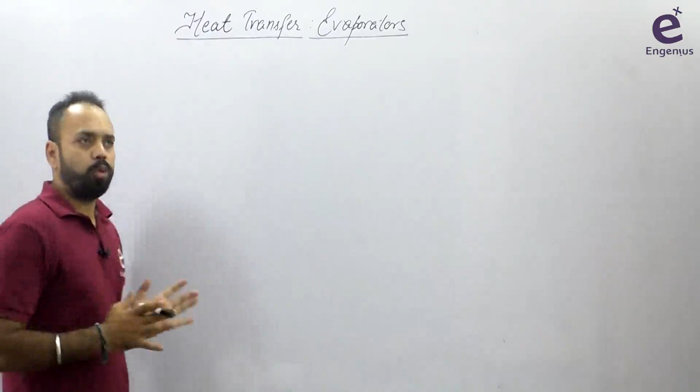What we are going to discuss here is how to calculate the area in the evaporator. This is the main point of our discussion because some numericals have come before and in upcoming exams more numericals can come for calculating the area. In 2020, there was a question based on multiple effect evaporators.

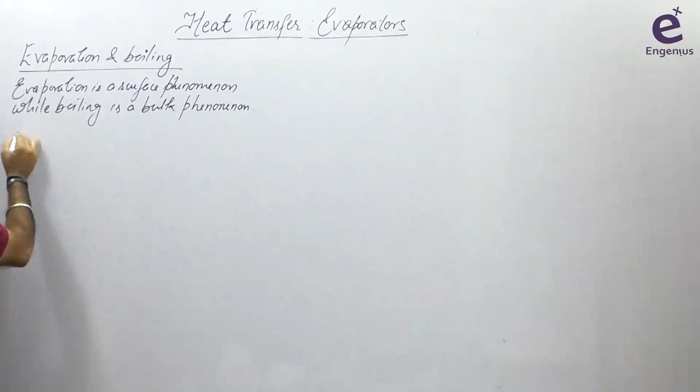Now you will ask, sir, to evaporate is it not necessary to go up to the boiling point? No, you can see the sea water - you know that sea water continuously, or water in a river, continuously evaporates. But if you put your finger inside that sea water or river water, it is not present at the boiling temperature. So the surface molecules of river water, sea water, a pond or a lake, they are having sufficient energy to go into the vapor phase.

Only the surface molecules - so evaporation can take place at any temperature. You will ask, sir, does that mean evaporation happens even at 5 degrees? Yes, some extent of evaporation is there. Some molecules always have sufficient energy which can go into the vapor phase. Evaporation can take place at any temperature, while boiling requires the entire liquid to be present at a specific temperature.

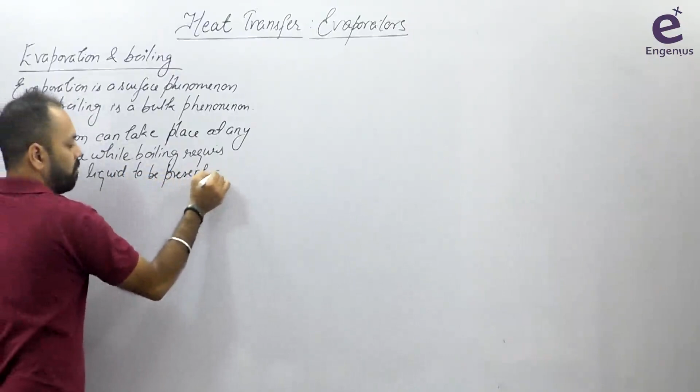These are the two main differences. Entire liquid has to be present at a specific temperature - these are the two major differences between evaporation and boiling. There can be some other minor differences as well.

Now the question arises, sir, what is the difference between evaporation and drying? Here a bit of confusion can happen because sometimes you may see that in the drying topic it is written that the moisture in the solid is evaporated. So in drying itself you are using the word evaporation. So they are actually having similar meaning - there is no phenomena difference between evaporation and drying. Evaporation and drying almost have the same meaning.

But the word drying is generally not used when you have a liquid which is vaporizing. The drying word is used when removal of moisture is taking place from a solid. But of course, for removal of moisture, the moisture is getting evaporated into air. So the word drying is with respect to solid. You wouldn't say that a liquid in a container is getting dried - you wouldn't say that, right? No. So the drying word is particularly used when moisture is getting removed from a solid by evaporation.

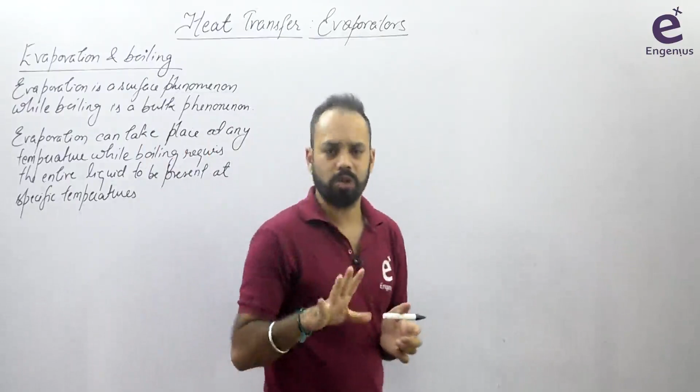So what is the difference between drying and evaporation? This is not exactly the right question to ask. But still some people who want to show you that you don't know anything, they may poke you saying you don't know anything - what is the difference between drying and evaporation? For that kind of situation, your answer should be: drying is referred to as removal of moisture from solid, while evaporation, normally when we say evaporation, we are referring to liquid.

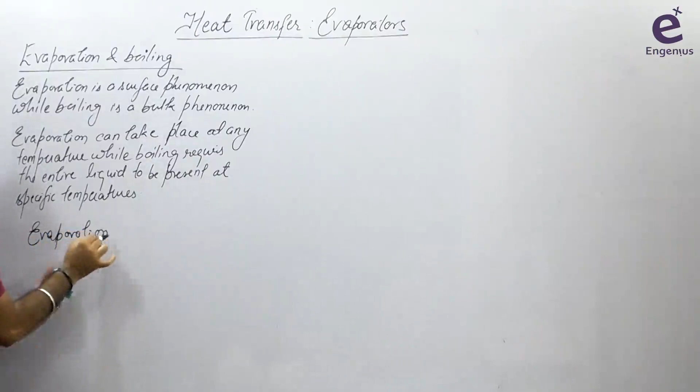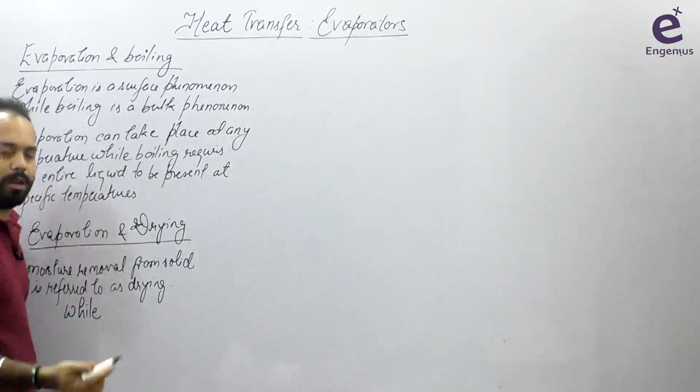So moisture removal from solid is referred to as drying. And when moisture removal from liquid happens, this kind of statement we don't usually give when evaporation is taking place, that moisture is removed from the liquid - such a statement isn't correct, right. So moisture removal from solid is referred to as drying, while the evaporation word is more common when a vapor is produced from a liquid. Evaporation word is used for vapors coming out of a liquid, for vapors coming out of water. Here's one more difference I'll tell you - when it is water, we use the word evaporation, but when it is any other liquid, we use the word vaporization. The phenomena is the same, but it's all about which particular word is suitable for what situation.

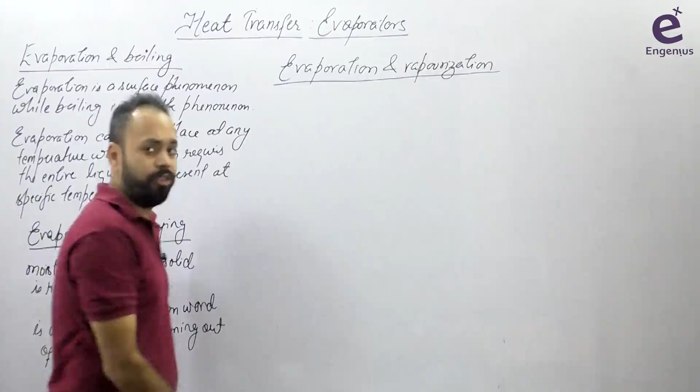So if someone asks you what is the difference between evaporation and vaporization, again it's all about in which situation we are using it. Otherwise things are same - the liquid is getting converted into vapor. So what is the difference? When it is water, we use the word evaporation. When other liquids, mostly organic liquids, we use the word vaporization. So for water turning to vapor, we use the word evaporation. For other liquids going into their respective vapor form, we use the word vaporization. So what is this? Vaporization. And what is this? Evaporation. It's all about where is the proper use.

Otherwise there is no strict rule for this. You'll find both words written in books. Many times in books you'll see drying and evaporation used simultaneously. I am telling you that evaporation of moisture from a solid leads to drying of the solid. Now you don't need to get confused there. This definition, these differences, I am just listing out for the records so that yes, I have read this too.

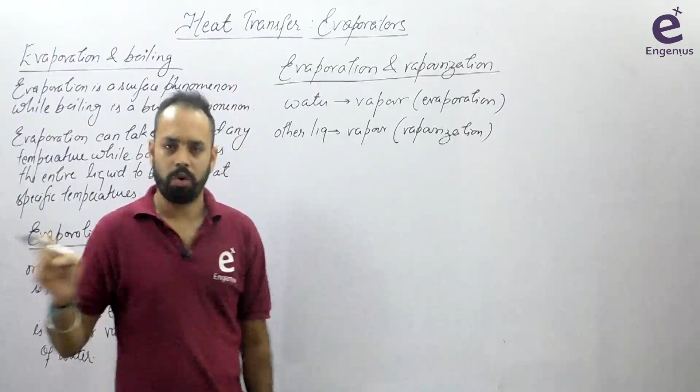Many of my friends - in fact one of them was my close friend in BTech. I think I've given his example many times. He was selected in IOCL in the passing year itself, 2013, when I did not know anything about chemical engineering. Most of the subjects I was almost zero in. If I kept comparing, then maybe I would not be here today. Then I thought, okay, he had to go, it happened, right. I took a drop. I was not preparing for GATE - actually I was teaching chemistry. But somehow in November, December, I thought okay, I should do something, let's study for GATE. I prepared for GATE, got into IIT Roorkee, and during my MTech I prepared all these subjects. Nobody was there to teach me. No teacher came and said, come, let me teach you thermodynamics. Even in IITs, nobody is going to teach you. You have to realize yourself that I have already spent 4 years in my BTech, then one more year as a drop - if I don't study now, then when will I study? When am I going to understand all these subjects? Otherwise, there's one more way - you leave all these subjects. One of my friends in final year told me, Pandey, this temperature-pressure stuff is too much, now I'm going to prepare for SBI PO. Okay, he chose his path. It's perfectly all right. I never say that going for MBA is fine or going for SBI PO is fine, going for UPSC is fine or going for GATE is fine.

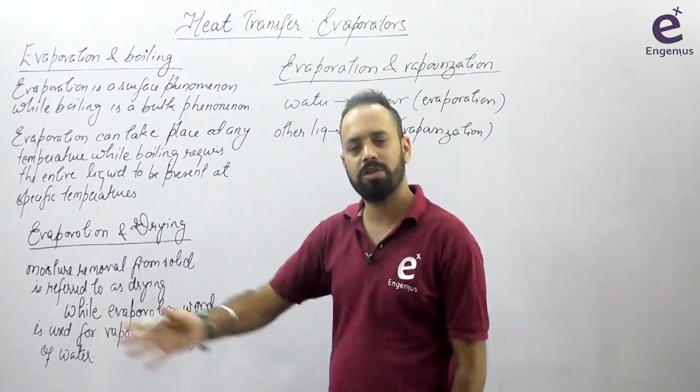But for the records we have discussed this. Okay, now let's talk about how evaporation takes place. My focus is the design of evaporators, right? So let's discuss a few things.

On the basis of number of effects. Effects means, sometimes we use multiple evaporators, sometimes we use single evaporators, right? So on the basis of number of effects, we have two types of cases. One is single effect evaporator, where only one evaporator will be used, and the other is multiple effect evaporators.

How many evaporators do you have? Suppose if you have only a single evaporator, it is called single effect. If you have multiple evaporators connected in series, I'll tell you the ways in which evaporators can be connected. I'll show you the proper diagram, right?

But if you have more than one evaporator connected in series, it is called multiple effect, as opposed to single effect. Now the question arises, because theoretical questions are made on this often: out of single effect evaporator and multiple effect evaporator, which one is more beneficial? And you also can't say one is simply more beneficial, because if in one aspect you are getting a benefit, then in another aspect you will be facing a loss.

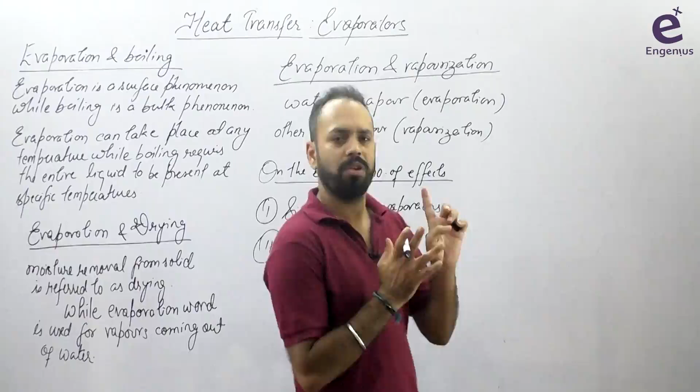It could be that in terms of production you are getting benefit, but in terms of energy cost you are getting a loss. So it's not that single effect is better or multiple effect is better. Don't ask this kind of weird or vague question, right? There is no meaning in asking which reactor is best, which evaporator configuration is best, which heat exchanger is best. There isn't one answer - ultimately the final decision is always taken on the basis of cost and safety, and cost and safety I can't calculate using the concept of heat transfer alone. I really can't. That you will do only when you are into the real world.

So these kinds of questions should not be asked. It's all about the particular case. In this case also, when you're going from single effect to multiple effect, in one aspect you'll be facing some profit or advantage, while in another aspect you'll be facing some loss. Okay, but still, what is the difference between these two? What is the actual difference?

So for understanding the difference between single effect and multiple effect, I'm going to define a few terms, right? Terms related to performance, because once you understand the definition of these terms, then only we can talk about single effect and multiple effect. So, terms related to performance of the evaporator - on the basis of what parameters do we decide that this evaporator's performance is better than another. Okay, so first of all, there is one very important term called steam economy.

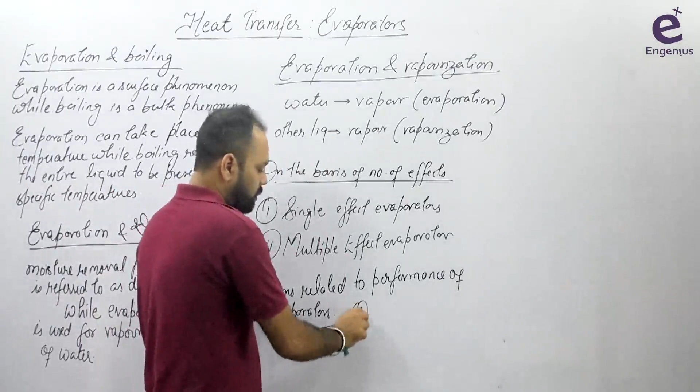Steam economy - and this definition, whether you talk about multiple effect or single effect, the definitions are the same, so we will compare them later. First of all, steam economy. What is steam economy? You know that in evaporation, I told you that we are trying to produce vapors, right? We are trying to produce vapors. What is the purpose of an evaporator?

Sorry, to evaporate the water from the solution. Now here another difference comes up. Sir, what is the difference between evaporator and boiler? They are doing the same thing, but the purpose is different.

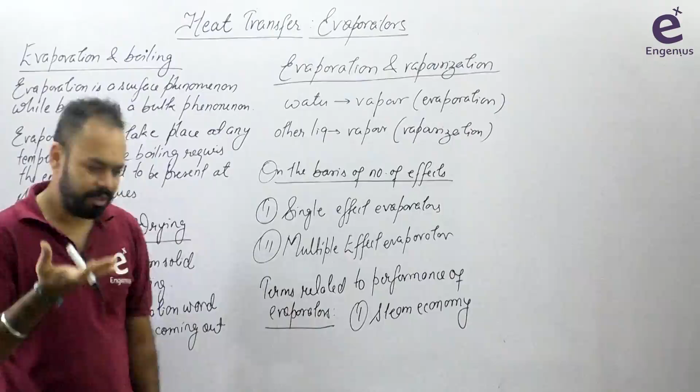In evaporation, the purpose is to make the aqueous solution concentrated, while in boiler, the purpose is to generate steam. These are names given for different purposes. If you come across these kinds of questions, you'll find this kind of difference. In both cases the same kind of process is happening - same mass transfer, same heat transfer is happening, right?

So terms related to performance of evaporators - the first one is steam economy. So in any evaporator, steam is used. Write it down here, that in any evaporator steam is used.

Steam is used. Now what does this steam do? Steam loses its heat - most of the time it's latent heat only, but it should be given in the question what kind of heat it is losing, right? Steam is used which loses its heat, mostly the latent heat, which should be provided to evaporate water.

Now the thing is, steam economy is defined as kg water evaporated per kg of steam used. So we define this steam economy as how much kg of water you have evaporated per kg of steam used. 1 kg of steam which you used, with its help how much water evaporates?

You will say, sir, from 1 kg will only 1 kg evaporate? No, it is always less than 1 kg. But right now let's not talk about whether we are talking about single effect or multiple effect. For now, one parameter is the steam economy, right?

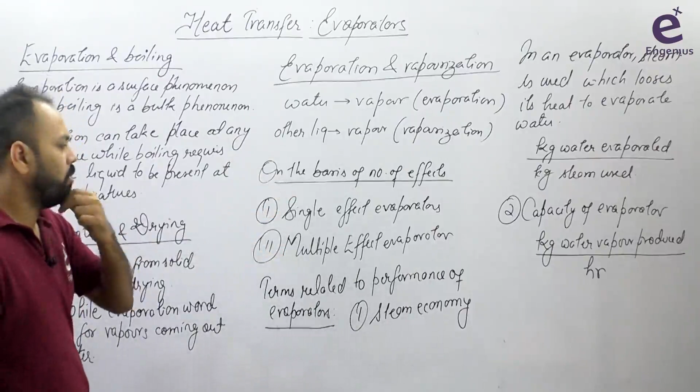vapor produced - steam produced, steam is getting used. So kg water vapor produced per hour. The 'hr' could also be minutes, that is not a big deal. kg water produced per unit time is the capacity, right? So kg water evaporated or water produced, they are the same thing, right? So here you can also write kg water evaporated, doesn't matter.

Okay, and if you talk about a third term, it is called consumption. Consumption is basically steam consumption. So steam consumption and steam economy are different things. If you take a ratio, consumption means how much steam your evaporator is consuming per unit time.

So if you take a ratio of capacity by economy, you can see that consumption is equal to capacity by economy, okay? Capacity is kg water vapor or kg water evaporated per hour, and economy is kg water evaporated per kg steam used. So ultimately you will be getting kg steam used per hour. So that is the third term.

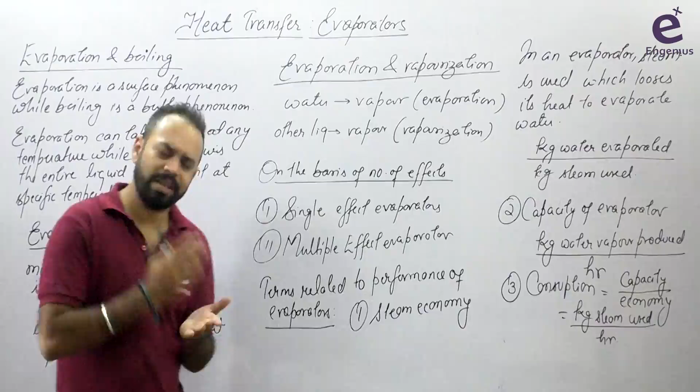इट्स माय जॉब कि मैं उस क्वेश्चन के पीछे भागता रहूं. मैंने पहले ही बताया कि मैं हमेशा क्वेश्चंस के पीछे भागता हूं. अगर कोई क्वेश्चन मुझे ऐसा मिल जाता है, स्टूडेंट्स ऑल्सो कीप मी आस्किंग सम क्वेश्चंस, आई ऑलवेज स्टार्ट थिंकिंग अबाउट दोस प्रॉब्लम्स, ठीक है, और कभी ना कभी मैं देखा हमेशा ऐसा होता है कि उसका सोल्यूशन मिला है, प्रॉपर सोल्यूशन, विद प्रॉपर रेफरेंस ऑल्सो. आई ऑलवेज लुक फॉर रेफरेंस, बिना रेफरेंस के ऐसा कम होता है कि हाँ, इफ आई डोंट हैव एनी आइडिया अबाउट अ पर्टिकुलर कॉन्सेप्ट, आई ऑलवेज लुक फॉर सम रेफरेंस.

सो दैट शुड बी योर नेचर ऑल्सो, बट बिकॉज मुझे तो पढ़ाना है, तो दिस इज माई जॉब, बट आपका काम एग्जाम देना, तो आपको उसकी टेंशन नहीं लेनी कि सर दीज 10 क्वेश्चंस, अरे बाकी हो गए, देखो यार तुम कहाँ थे इस टाइम में, आपसे क्वेश्चन नहीं बन रहे थे, और अभी आप 99% क्वेश्चन, 98% क्वेश्चन ऑफ प्रीवियस ईयर यू हैव डन, दैट इज मोर देन सफिशिएंट.

ओके, सो प्लीज राइट ऑल दीज डेफिनेशंस: three parameters to evaluate the performance of evaporators - economy, consumption, and capacity.

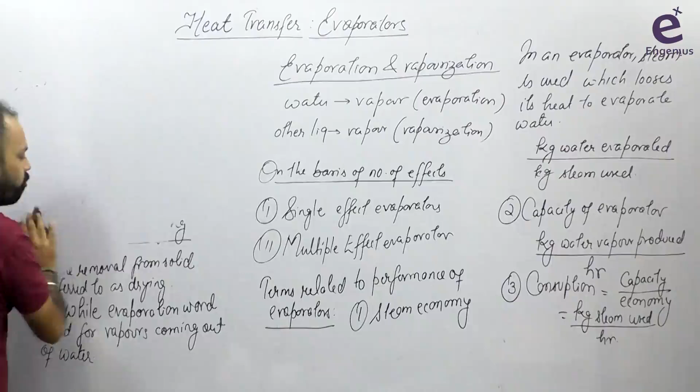Okay. Now let's talk about the single effect and multiple effect. Why someone wants to go from single effect to multiple effect? First of all, अभी मैं आपको feed arrangement of evaporators के बारे में बताऊंगा, but before that, if you talk about single effect evaporators,

single effect evaporators, you can write here that economy means steam economy is always less than 1. Economy is always less than 1.

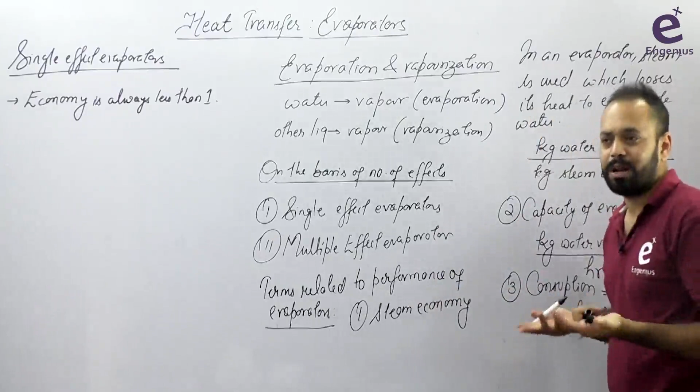I'll also discuss the material and energy balance on evaporators, don't worry, तो मैं diagrams वगैरह बनाऊंगा, but पहले थोड़ी सी जो फीड अरेंजमेंट्स हैं उनके बारे में डिस्कशन कर लें। सिंगल इफेक्ट इवेपोरेटर्स, इकोनॉमी इज ऑलवेज लेस देन 1. कैपेसिटी वी कांट से लेस देन 1, मोर, कैपेसिटी कैन बी एनीथिंग, 10 kg per hour, बिकॉज इकोनॉमी इज अ रेशियो, राइट, एंड इकोनॉमी डेफिनेटली फॉर सिंगल इफेक्ट इवेपोरेटर्स इज लेस देन 1.

Now, when we talk about multiple effect, there was a question in GATE that why we go from single effect to multiple effect. So there is a specific advantage in choosing multiple effect evaporators over single effect - choosing multiple effect evaporators over single effect has a specific advantage.

What is that? ये एडवांटेज समझने के लिए पहले आपको समझना पड़ेगा कि मल्टीपल इफेक्ट में कॉन्फ़िगरेशंस क्या क्या होती हैं ना. देयर आर वेरियस 3-4 टाइप्स ऑफ कॉन्फ़िगरेशन, बट राइट नाउ आई एम गोइंग टू डिस्कस ओनली वन कॉन्फ़िगरेशन.

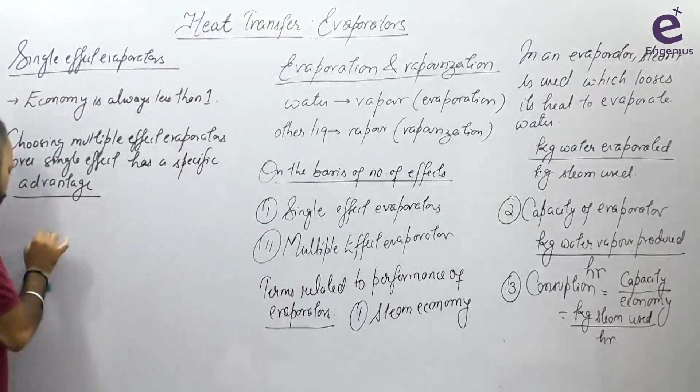सी, दिस इज अ पर्टिकुलर टाइप ऑफ कॉन्फ़िगरेशन. अभी इसका मैं नाम नहीं बता रहा, बट लेट्स से दिस इज फर्स्ट इफेक्ट. इफेक्ट 1 मींस द फर्स्ट इवेपोरेटर. दिस इज द सेकंड इवेपोरेटर, एंड देन द थर्ड इवेपोरेटर.

ठीक है. वन क्वेश्चन आई वुड लाइक टू आंसर हियर. दिस इज द थर्ड इवेपोरेटर. अभी मैंने जस्ट बेसिक डायग्राम बनाया, एंड अभी मैं आपको फीड अरेंजमेंट भी अभी नहीं बता रहा, क्योंकि फीड अरेंजमेंट मुझे कोई ना कोई अरेंजमेंट तो लेनी पड़ेगी ना फॉर एक्सप्लेनिंग द कॉन्सेप्ट.

ओके, सो चूजिंग मल्टीपल इफेक्ट इवेपोरेटर ओवर सिंगल इफेक्ट has a specific advantage. What is that advantage? Let's see. Right. So, yeah, I was answering a particular question that how we number the effects.

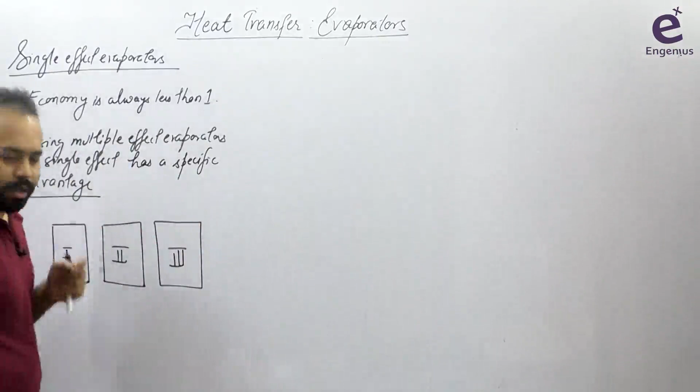I mean, is it always from left to right, or what is the rule? So please note that the effect in which - this is important for you to understand, ये हमेशा valid होगा, not only this configuration but every configuration - in which the steam enters first, or the effect in which the steam enters is called the first effect. तो steam के हिसाब से effect होता है, feed के हिसाब से नहीं होता है. The effect in which the steam enters is called the first effect.

Suppose the steam is entering from the left side and the feed is entering from the right side, then this will be called first effect. Suppose if the steam is entering from here and the feed is entering from here, this will also be called first effect. This concept must be clear.

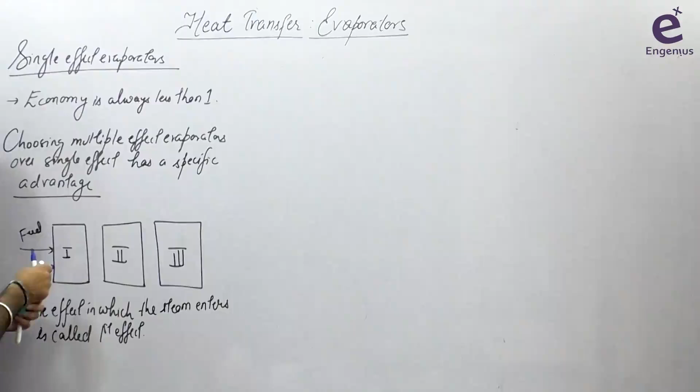Okay, now this is the first evaporator. Suppose the feed is entering from here, and in this same evaporator I also made steam enter. Now what happens, the steam is entering, this is the feed. I will tell you all the configurations later, don't worry. This is steam, feed is entering.

Steam is entering. The steam evaporates the water in the first effect and itself condenses. The steam which condenses comes out from here. The condensate comes out from here.

Now, the water vaporized from the first effect goes here, while the liquid coming from the first effect goes into this evaporator, the second effect.

This liquid, now to heat it in the second effect I am not introducing steam again. Instead, the vapor leaving the first effect is used to heat this liquid present in the second effect. Again it will produce some vapor, and this vapor is also going to condense. Don't worry, it will condense and come out, it will not mix into this liquid. This will condense and come out.

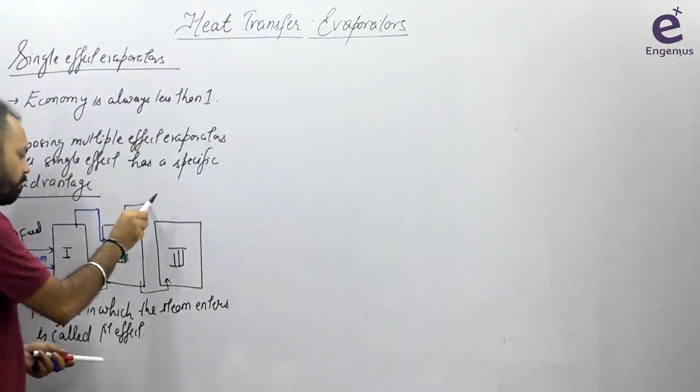So what do you observe? This liquid goes into the third evaporator, and the vapor coming from the second evaporator is used to vaporize some more liquid in the third effect, and then you have the final product. This is a particular kind of arrangement, I'll talk about that arrangement, don't worry.

So what do you see here? What is the definition of economy? Kg vapor produced per kg steam used. Now see, I am using steam only once, in the first effect only, while vapor is getting produced here. This condensed, then using this heat, vapor is getting produced here, and vapor is getting produced here again.

So if I define economy, kg vapors produced is this plus this plus this, because this was also vaporized by me. Later it gets condensed and comes out of the system. See, this comes out and does not mix into the liquid. This is not direct heat transfer, this is indirect heat transfer. This will condense out and go out.

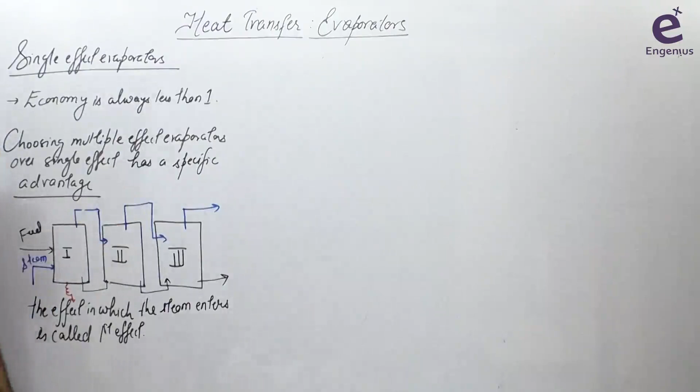Ultimately, my solution is getting concentrated. So in this case, only 1 kg steam is used, or suppose steam is used only once, but vapor is produced 3 times. So what is the main reason, what is the specific advantage of multiple effect evaporators? They have more steam economy.

This is the reason why we go for this, because steam cost is higher. Of course you will say sir, evaporators are also installed, that will also have cost. No, we can't compare cost that way. But if someone asks you why multiple effects, this is the reason: multiple effect evaporators have more steam economy.

And of course this steam economy will be greater than 1 as compared to single effect evaporators. That is one reason, as compared to single effect evaporators.

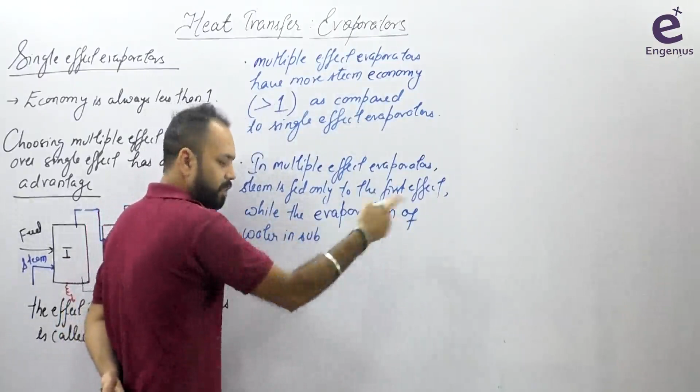Steam is fed only to the first effect, while the evaporation of water in the upcoming effects, meaning in subsequent effects, is done by vapors produced from the previous effect.

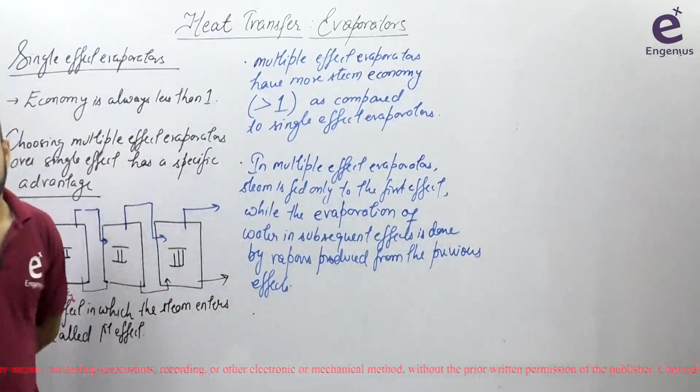Now there comes another concept - there is a limitation of multiple effect. There is a line written in standard books, like if you follow McCabe, it's written there, they haven't explained it but you have to understand it conceptually - that in multiple effect evaporators, we get the advantage of higher steam economy, but we have to bear a loss.

We have to bear a cost. You get higher steam economy, but to get this higher steam economy, you have to bear a loss. And what is that loss? It is lower capacity. Now how can we say that we have lower capacity in case of multiple effect evaporators?

So for talking about that, before going to lower capacity in multiple effect evaporators, let us first try to understand what are the various configurations. Let's understand this much for now. I'll come back to this point because otherwise I'll have to use terms which you can only understand if you know what are the various feed configurations.

Then I'll tell you how to write mass and energy balance on a single effect evaporator. The designing of evaporators, meaning calculation of area of evaporator - the main equation for that design is the heat transfer in the evaporator equals the overall heat transfer coefficient multiplied by area and then the temperature driving force.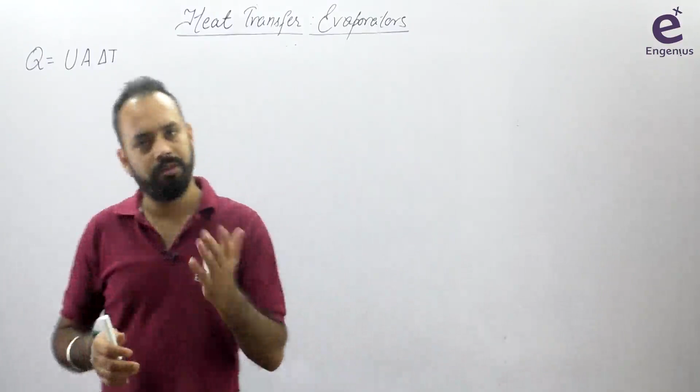Here this confuses you a bit - what to take in delta T. See, delta T is the temperature driving force, meaning the temperature difference which is used for heat transfer. Now who is heating? What we are using for heating is the steam.

So when you write U A delta T, then definitely the first temperature should be the one at higher temperature - steam - and that should be the temperature of the steam, because heat is getting transferred between the steam and the liquid present inside the evaporator. So whichever two things heat is being transferred between, take their temperature difference. One is the steam having temperature T steam, minus the second - the liquid which is receiving the heat, present in the evaporator.

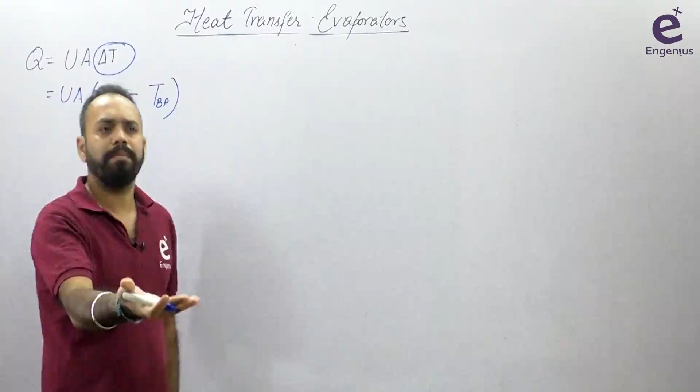Delta T is always the temperature difference between steam temperature and the boiling point of that liquid. While solving problems, many times we say that steam is available at a particular pressure, and at this pressure the saturation temperature of the steam is given. That saturation temperature of the steam, we call it T steam.

What is TBP? TBP is basically the boiling point of the feed mixture, and this feed mixture boiling point depends upon the pressure. Evaporator has some pressure inside it, and it is always operated under some pressure. So the boiling point of the feed corresponds to the pressure inside the evaporator. At that pressure, whatever the boiling point is inside the evaporator, that is TBP.

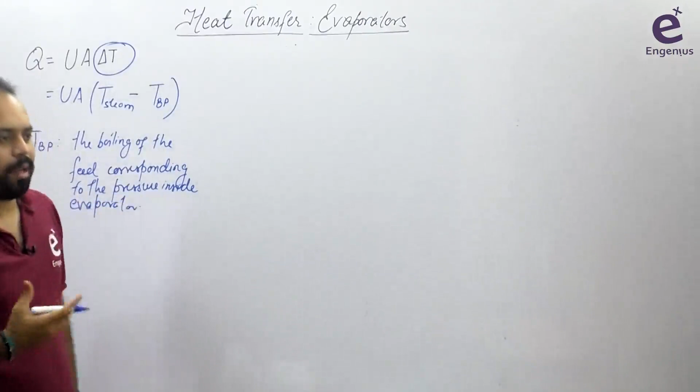What is T steam? It is the temperature at which steam is present. Many times steam is saturated, meaning it only gives the latent heat. So many times in the question, data is given such that steam is available at this much pressure, but the pressure of the steam and the pressure of the evaporator are not the same thing. Mostly saturated steam is used, which only has latent heat to give.

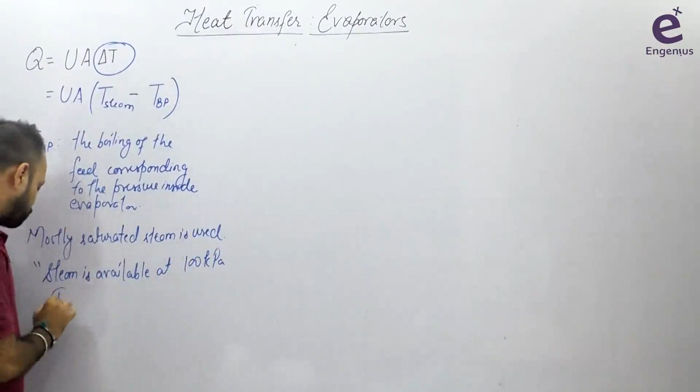So in this case, this kind of data is given, and you should know how to use such data. Let's say steam is available at some pressure, for example Psat at 100 kilopascal. The saturation temperature Tsat at 100 kilopascal is, let's say, 130 degrees Celsius. From this statement, if I ask you what is the temperature of the steam, you can easily write that the temperature of the steam is 130 degrees Celsius.

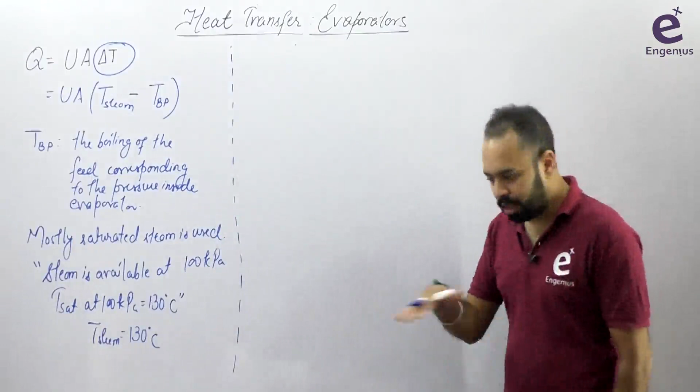Keep in mind what comes in delta T. Now you must have read in 11th or 12th class that when you make a solution comprising liquid and solid, you took a solid solute and dissolved it in a liquid, then we studied colligative properties. Colligative properties means reduction in vapor pressure, elevation in boiling point, depression in freezing point, and osmotic pressure. There was a property called elevation in boiling point. Whenever you make a solution of solid solute dissolved in a liquid, there is elevation in boiling point.

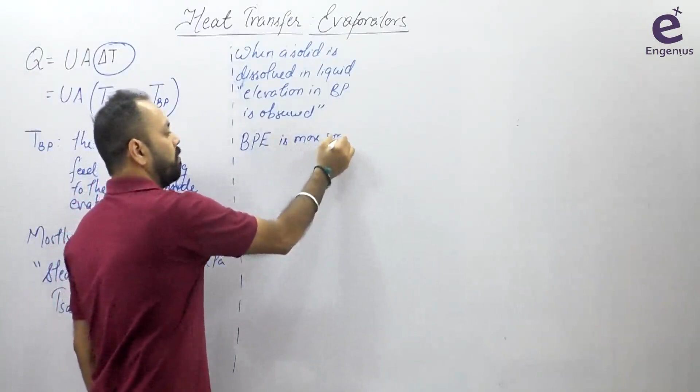When a solid is dissolved in liquid, elevation in boiling point is observed. One thing you must have noticed is that this elevation in boiling point is a colligative property, and a colligative property depends on the number of particles. Meaning if you increase the solute, the colligative property will be more and more. This boiling point elevation, written in short as BPE, is more significant in concentrated solution.

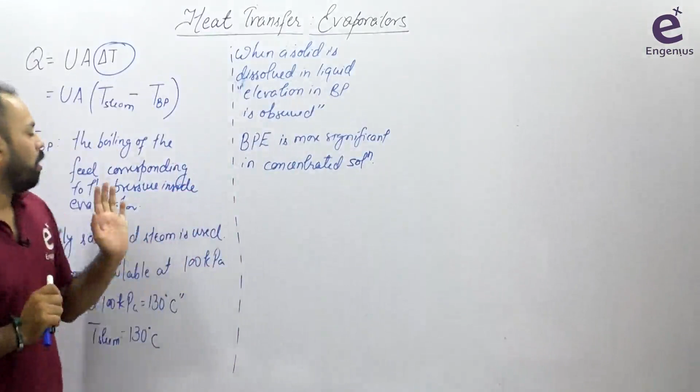Simple, right? One more thing - how can you determine boiling point elevation by a formula? No, it has to be provided in the problem. Otherwise, there are tables, charts called Duhring charts, used to obtain the determined BPE.

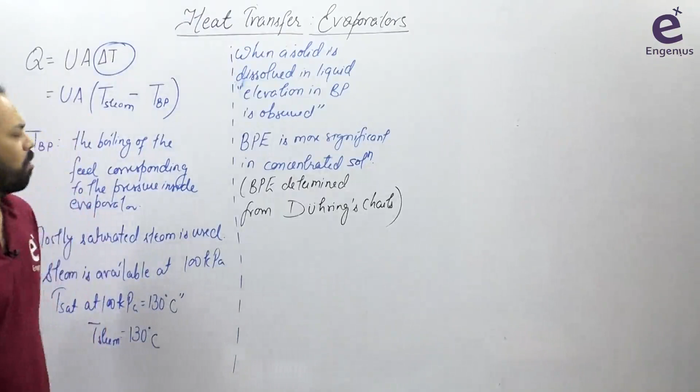The thing is, Q is written as UA times steam temperature minus boiling point of this solution, right? Suppose if the solution is concentrated, then definitely if BPE is significant - how do we decide what is significant and what is not? Simple, if it is provided in the question, it is significant, otherwise ignore it.

If BPE is significant, then definitely the boiling point is going to increase significantly. Now if boiling point increases, what happens to the driving force for heat transfer? This driving force decreases. Earlier you had 130 minus 100, now you have 130 minus 110. The driving force decreases, and that is the bad news.

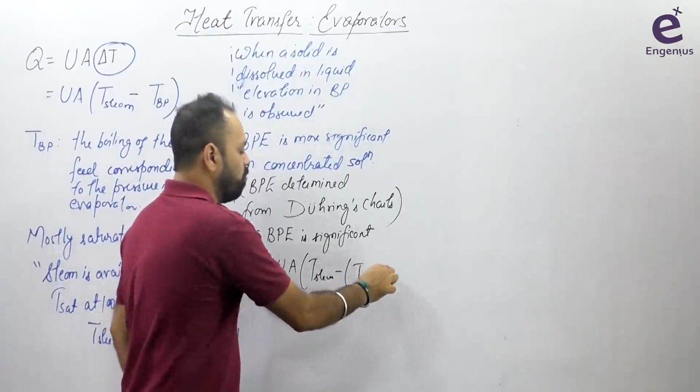So boiling point elevation is there, suppose 5 degrees Celsius or 10 degrees Celsius elevation, it can be this much significant, and this much reduction is going to reduce the driving force for heat transfer. So less heat will be transferred, obviously. Less heat transferred means less evaporation, right? So this is the role played by boiling point elevation.

Less amount of heat will be transferred, and boiling point elevation needs to be included in this equation in this way, right? Okay, note down, first of all note this down.

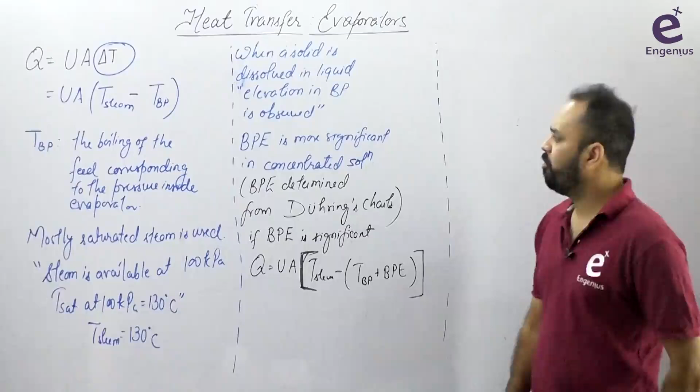Now, I was saying that in evaporators, when we use multiple effect evaporators, we have more steam economy, but there is a loss, right? But before talking about that loss, let us talk about the various configurations of multiple effect evaporators. So there are 4 configurations.

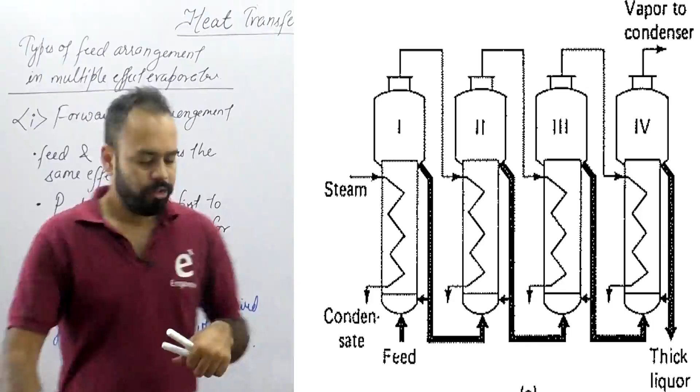So now you'll say, sir, okay, at some places pump will be saved and at some places pump will be needed, definitely it will be there, right? So that was the first kind of arrangement. You should know all these things here. Yes, definitely economy is more than the single effect.

Now you'll say, sir, explain that capacity thing. So definitely I'll come to the capacity. Or let's do one thing, let's explain it here itself. We want to compare the capacity of multiple effect evaporators. But again I am having some assumptions.

Suppose there is one effect, a single effect. This single effect has area A, overall heat transfer coefficient U, and overall temperature difference delta T. Now what is the heat transferred?

Q is equal to U A delta T, correct? I'm assuming capacity is proportional to heat transfer. The more heat transfer I do, the more water will evaporate. So for single effect, capacity is proportional to Q, which is UA delta T.

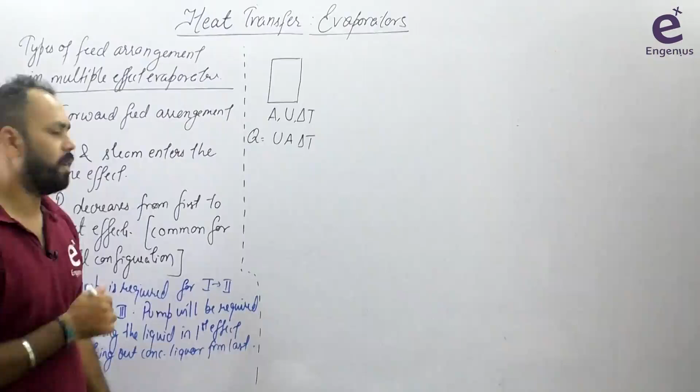Let's say I have multiple effects. Now when you talk about multiple effects, if this single effect is having area A, then each effect is also having area A. Many times students think that sir, make it A by 3, or make it 3A. No, each effect is also having area A and area A.

But what is same is the temperature difference. The net temperature difference is delta T, right? So let's say this is T1, this is T2, this is T3, this is T4, and T1 minus T2 plus T2 minus T3 plus T3 minus T4 equals the net difference. So the net temperature difference is T1 minus T4, and the same temperature difference I'm maintaining here, T1 and T4. So the temperature difference remains the same.

So if I ask you what is the heat transfer rate across all these three heat exchangers, you'll say sir, across these three heat exchangers... So I am removing this diagram, let me remove the first diagram so that some space gets used here.

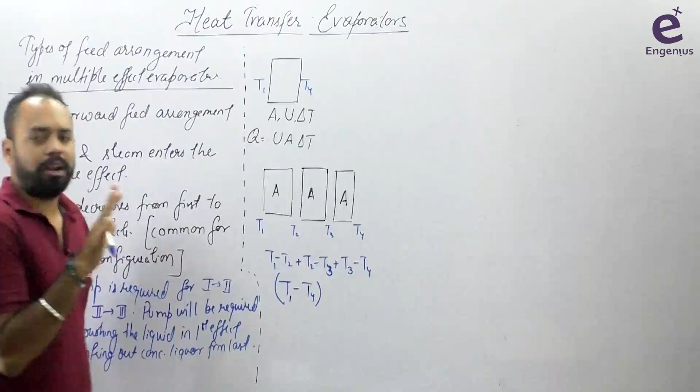End of course, I'm assuming any multiple effect, feed forward kind of feed arrangement of the evaporators. First of all, I'm assuming this is having area A, and each effect is having the same area A. Area shouldn't change, but we are having the same temperature difference across these three effects, and the same temperature difference is existing here for the single effect. So what is the amount of heat transfer?

We say that the amount of heat transfer is equal to UA(T1-T2) plus UA(T2-T3) plus UA(T3-T4). Ultimately you are getting this as UA(T1-T4), and the same here is UA(T1-T4). So what do you observe?

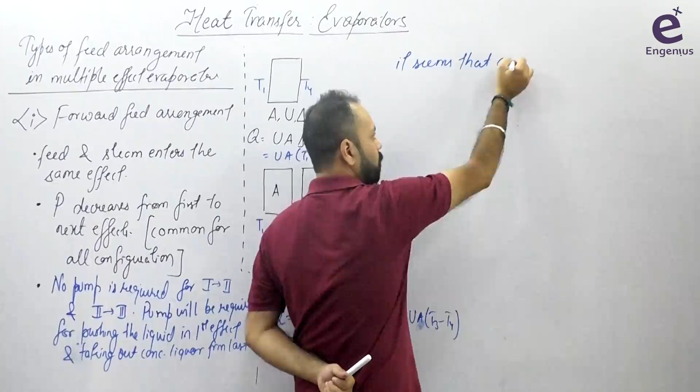You observe that in a multiple effect evaporator, capacity is equal. Why did I say less? Because there is a factor. It seems that capacity in a multiple effect evaporator is equal to the capacity of single effect evaporator. This is fine, multiple effect evaporator capacity and single effect evaporator capacity are same, it seems like this from this mathematical calculation. Yes, multiple effect capacity at max can be equal to single effect capacity, cannot be greater, right? But there can be a case.

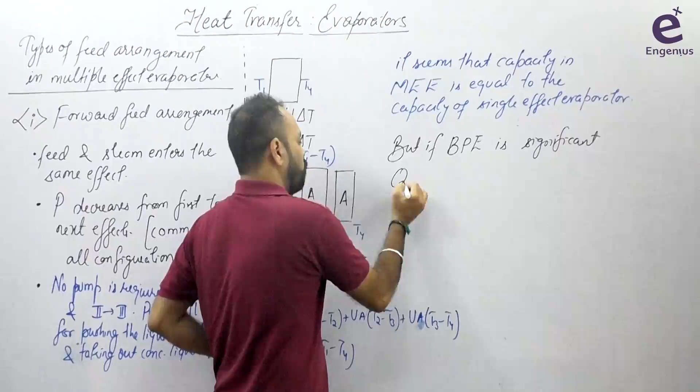But if boiling point elevation is significant, and you know that as the concentration increases it becomes more and more significant, then you'll write that Q is equal to UA(T1-T2). T1 is the feed temperature, suppose, or T1 is this temperature. Then the net driving force available, if boiling point elevation is significant, will not be equal to T1 minus T4, it will be less. Then write down directly: significant, then net delta T available.

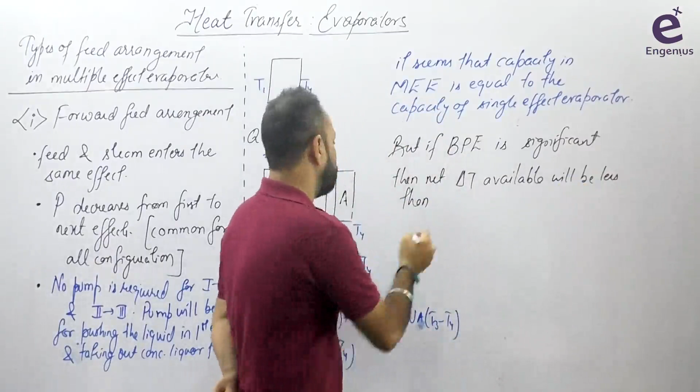Does this make sense to you? I told you here about BPE. What is the role of BPE? It decreases the delta T. So if BPE is significant, then in each effect this delta T will be less, then further less, and then further less. So the sum will not be equal to this delta T. The net delta T available will be less than T1 minus T4. And if net delta T available is less, then Q will become less.

In this case, multiple effect, and as you know, in case of multiple effect evaporators, boiling point elevation is always there at least to some extent. In this case, capacity of multiple effect evaporators will be reduced. Capacity of multiple effect evaporators will be reduced. Okay, this is the explanation.

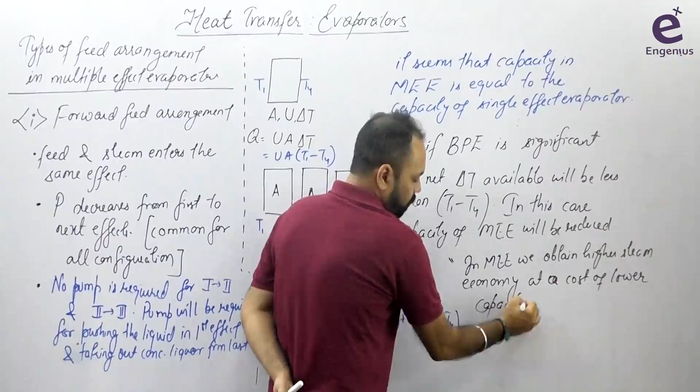So what is the net conclusion? At max, a multiple effect evaporator can have capacity equal to a single effect evaporator when the boiling point elevation is not significant. But when boiling point elevation is significant, which is the case in most situations, the multiple effect evaporator will give you higher economy but less capacity. So from here comes the statement that in multiple effect evaporators we obtain higher steam economy at a cost of lower capacity. So capacity becomes low, but steam economy is more. This statement comes out from here.

Now let's erase this. Let us discuss about the other feed arrangements. One is, another one which is quite common, is the backward feed arrangement. You can see the diagram. Let's erase here once and then you can see the diagram. Now the next one is the backward feed arrangement. So put the heading.

These are theoretical things from where questions can be formed. You know, this whole evaporator topic will take you about 2 hours to read. These are small topics, so don't take too much load on them. Only 2 hours are sufficient for going through all this discussion, right? And of course you have questions in the test series, you can practice them, right?

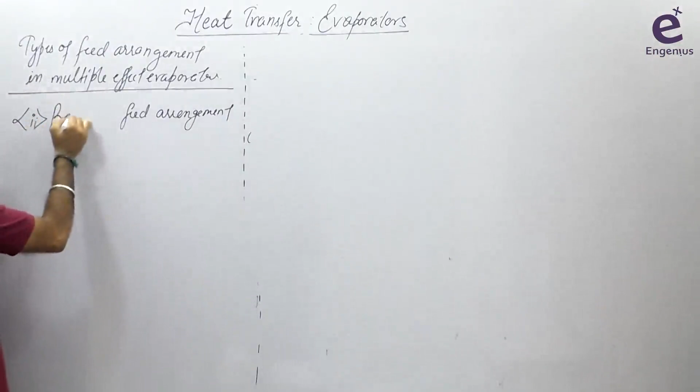So the second one is backward feed arrangement. In this case also, steam will enter that effect which will be called the first effect, and it will be having high pressure. This is common, right? So the feed enters the last effect. You can see the diagram. The feed enters the last effect.

Last effect means the effect in which the pressure is lowest, because the pressure is highest in the first effect where the steam is entering. This means steam's entrance and feed's entrance are happening from opposite directions.

So you ask, sir, why do we do this? The feed enters the last effect. First, let's talk about the pump. In this case, the feed will be traveling from low pressure to high pressure effects, and therefore a pump will be required in each and every effect. So you can write that the liquid will travel against pressure. For steam, it won't be needed since steam goes from high pressure to low pressure effect. The liquid is traveling from low pressure effect to high pressure effect, and hence pump will be required in each case.

Now the question arises, sir, in which situation can we go for backward feed arrangement? See, sometimes as temperature increases, the viscosity of a liquid decreases - this is the general rule. What is the problem with viscosity? There are various problems. If the liquid is highly viscous, its pumping is difficult and pumping cost is more. Which liquid is viscous? If the concentration is very high, it will be viscous. For highly viscous liquid, it is difficult for us to pump it.

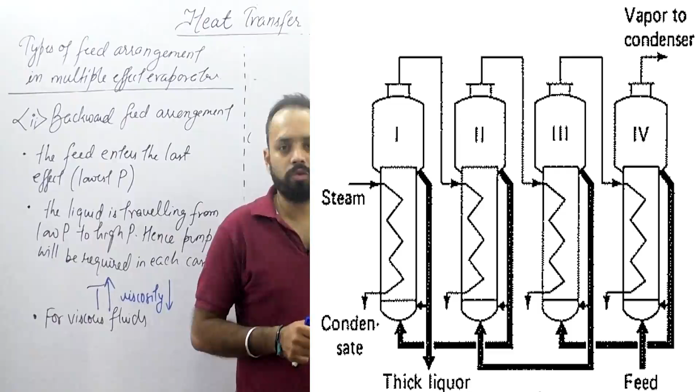Plus, see, suppose if your feed is viscous, what is going to happen? Consider the scenario in the diagram. Let us discuss the opposite case - suppose we have a viscous fluid and I am using the forward feed arrangement. If I use forward feed arrangement for a viscous fluid, as evaporation is taking place, the concentration is increasing. Also, in forward feed arrangement, the last effect has very low temperature. So as more evaporation takes place, the feed becomes more viscous, and also temperature decreases, making the feed even more viscous. So as more evaporation takes place, viscosity increases, and to support that, decrease in temperature also helps increase viscosity. That is not good for us - viscous fluids are difficult to pump.

But if I use backward feed arrangement, see what is the advantage. You'll say, sir, backward will also have evaporation. In backward feed arrangement also, more and more fluid will be evaporated, and due to this, viscosity will increase. But in backward feed arrangement, the liquid first enters low temperature, then progressively higher temperature. So one factor is that as evaporation happens, viscosity increases, but as temperature is also increasing, it tries to cancel out the effect of increase in viscosity. So these are two opposing factors. That's why for viscous fluids, backward feed arrangement is used.

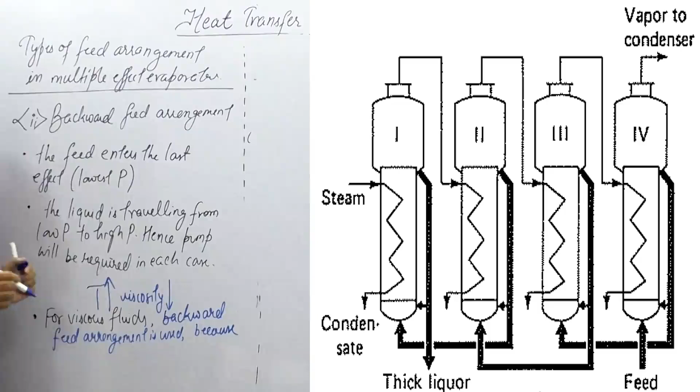Backward feed arrangement is used because - this line is written in books - the most concentrated liquid is present at the highest temperature. What happens from this? It's a good thing, because the most concentrated liquid has more viscosity, but if it is present at high temperature, then the increase in temperature will try to lower that effect somewhat - it will be a bit lower compared to before. So in this feed arrangement, because the most concentrated liquid is present at the highest temperature, this tries to reduce the viscosity. So one case is that for viscous fluids, backward feed arrangement is preferred.

One more case is there: if the feed is cold feed, meaning it is below the bubble point, if the feed is cold, then also backward feed arrangement is preferred.

Backward feed arrangement is preferred. Why? What do you think? Simple explanation.

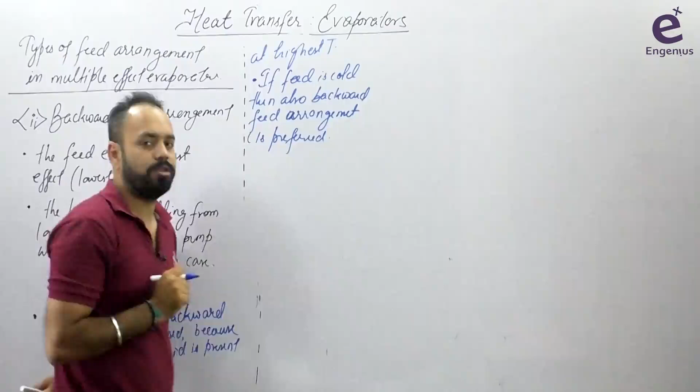If the feed is cold and you are using forward feed arrangement, the cold feed requires some heat to reach the boiling point. So if you use forward feed arrangement, some heat will be required to increase the feed temperature to the boiling point. And where will this heat come from? From the steam, because in the first effect steam is entering. So some heat will be taken from the steam to increase the temperature of the cold feed to the boiling point, so definitely less steam will be available.

Less heat will be available from the steam for evaporation, so less evaporation will happen. Less evaporation leads to less economy, because economy is kg water evaporated per kg steam used, so less economy.

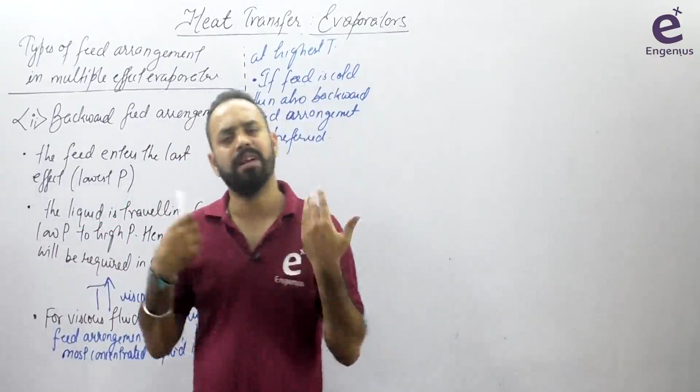But if I use backward feed arrangement, then heat will still be required, but that heat will be taken from the vapor released in the previous effect. In the first effect, the steam gives its entire heat for evaporation rather than for increasing temperature. So we have the advantage of saving the energy of steam when using backward feed arrangement in the case of cold feed.

So you need to remember that for viscous fluids and cold feed, backward feed arrangement is more suitable.

Apart from forward and backward, there are two more cases. One is called mixed feed arrangement, where the feed enters in some intermediate effect. Suppose we have 4 effects - the feed enters in the third effect, travels to the fourth like forward feed, then comes back to the second effect and then the first, like backward feed. So it's a mixture of forward and backward feed, called mixed feed arrangement.

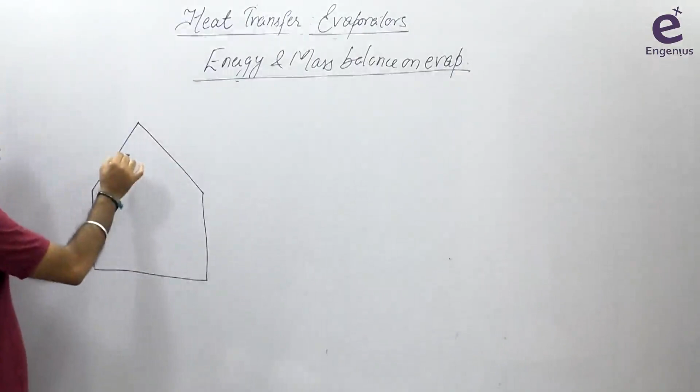The pressure inside the evaporator is P1. This is single effect, so P1 pressure. Feed is entering the evaporator with a flow rate of F kg per hour. It has enthalpy HF, a temperature of TF, and a mass fraction of XF. I've written all the things we'll need and we'll use them as required.

Steam is also entering, with a flow rate of S kg per hour. What is the temperature of the steam? T steam. The steam has latent heat, denoted by lambda s, in kilojoules per kg, and it is used to heat.

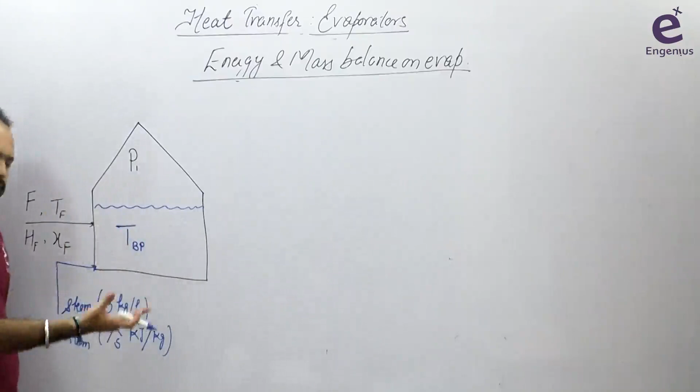At pressure P1, suppose the boiling point of this liquid is T Bp. If there is boiling point elevation, I should add the elevation to this T Bp. And from here, vapors are leaving - let's say the vapor flow rate is V, and the enthalpy of vapor is HV. We'll use small h, capital H as you've learned in thermodynamics.

VHV, and this liquid is the concentrated liquor which is L, having the enthalpy HL.

Now let me tell you some rules here. Suppose if TBP, for solving most of the problems, we take TBP as the reference temperature. We always assume that this liquid is leaving at a temperature equal to the boiling point of this liquid under this pressure. So the rule is: TBP should be taken as the reference temperature, if you need one.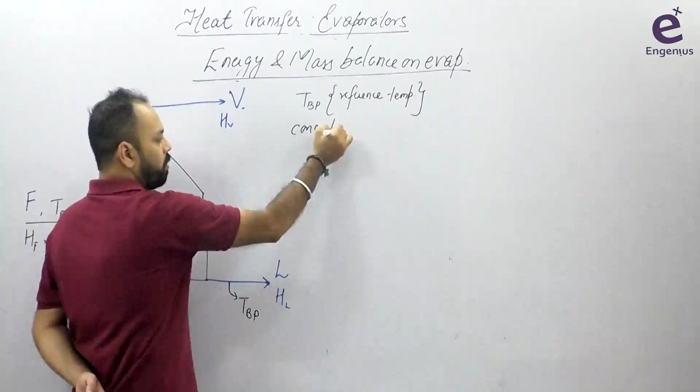Secondly, the liquor leaving, the concentrated liquor, is assumed to leave at a temperature TBP. That is the second point, remember this. Even vapor is assumed to leave at the same boiling point temperature, right?

So I think I have discussed everything here. This is the scenario, right? Suppose heat transfer coefficient is U and area available for heat transfer - because steam is not directly mixing in this, indirect heat exchange is happening between steam and this liquid - the area available is A.

Now how are you going to write the balances? First of all, mass balance. Writing mass balance is quite simple.

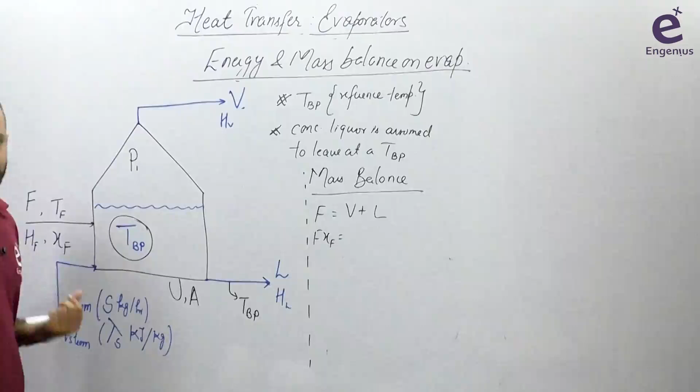XF is the mass or weight fraction of solids. You know that we have to assume that vapor never has solids. These are some basic things you should know - the question will never give this information explicitly. Vapor never has any solids, so it's V into 0 plus LXL. This we have already done in process calculations, it's not a new thing for us, right?

Energy balance - we need to write a steady state balance, right? No shaft work, and kinetic and potential energy changes are neglected. So energy balance at steady state depends on what kind of data is given to you.

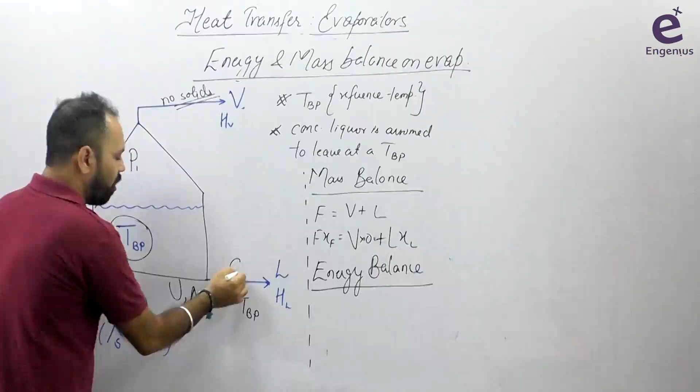Suppose let me take one more data here. The Cp is Cp, and suppose Cp is constant for this - if it's not constant, it should be provided. Let's say this also has specific heat Cp, this also has specific heat Cp. But here's the thing - if enthalpy is already given to you, then why look for Cp? What will you even do with Cp?

Cp, specific heat, is used in mCp delta T - you use it to calculate enthalpy. But if enthalpy is directly given to you, HF, HV, HL directly given, why write mCp delta T? I've seen that students don't realize that mCp delta T is used just to find enthalpy. So if enthalpy is given directly, these are actually molar enthalpies, right?

These are, let me write this in the form of a cap since you're familiar with this notation - these are specific enthalpies. If specific enthalpy is given, multiply it to get total enthalpy. So what is the energy balance?

Delta H is equal to Q external, because this is not adiabatic. The same equation we studied in process calculations applies here. Sometimes I don't write delta H equal to Q external, so students think the energy balance for an evaporator is different. But see, energy in plus energy added equals energy out. That's exactly delta H - energy out minus energy in equals Q external, which is the heat being added from here. Question solved. Now, what is the enthalpy entering the system?

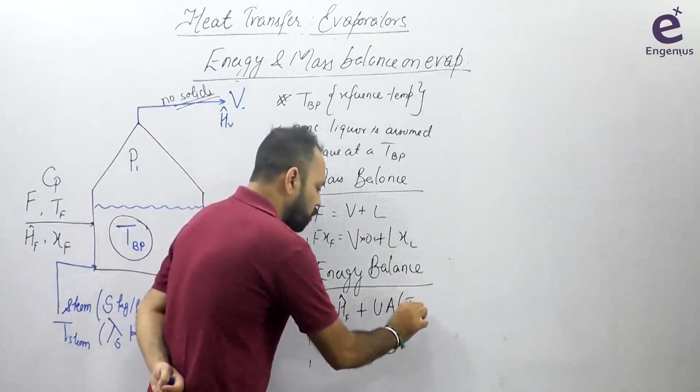F into HF - suppose if enthalpy is directly given to you, write the balance like this. This is entering, plus what is entering? The energy entering in the form of heat transfer from the steam. So how do you write that? How is heat transfer happening from steam? UA times T steam minus TBP. Correct? F HF plus UA times T steam minus TBP - that's what's happening. If there's elevation, then BPE gets added to BP.

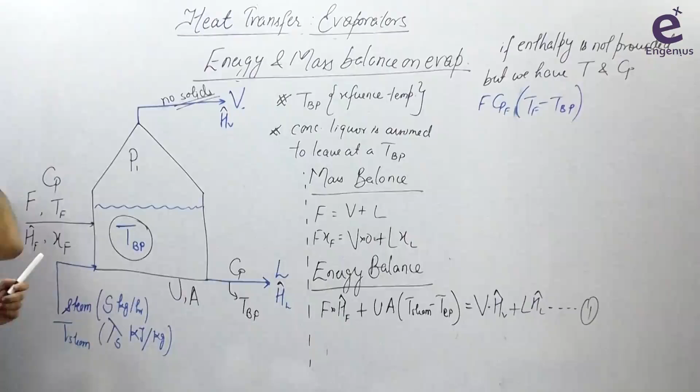What is the enthalpy of feed in this case? F, flow rate, times CPF, times what temperature? TF. Now the question arises - what should be the reference temperature? I gave you the rule that reference temperature should be TBP. That's why sometimes you write delta T as TF minus TBP - that's the delta T, because TBP is the reference for defining enthalpy. So I am writing TF minus TBP, right?

Plus steam, right? So what is the heat transferred? UA times TS minus TBP, right? That equals what - what is the enthalpy of this? Suppose the flow rate is V. What is the enthalpy of this one? This is the condensation of the steam - this is VHV, there's nothing else, just enthalpy, V into HV.

Sometimes the data given to you is the enthalpy of vaporization of the liquid - that enthalpy of vaporization is this, so V into HV. And what about this? I have considered this as my reference TBP, so what is the enthalpy? Zero - the enthalpy of the reference is always zero. So either we use this equation depending on the data, or I use that equation. One more thing - later, both won't be used; either I'll use this equation or this one. Apart from this, I will also use this equation.

UA times T steam minus TBP - this is the heat transferred by the steam, and this should also equal the flow rate of the steam times latent heat of condensation of the steam. This is also an equation - equation number 3. For solving evaporator problems, either these two equations will be used, or these two will be used.

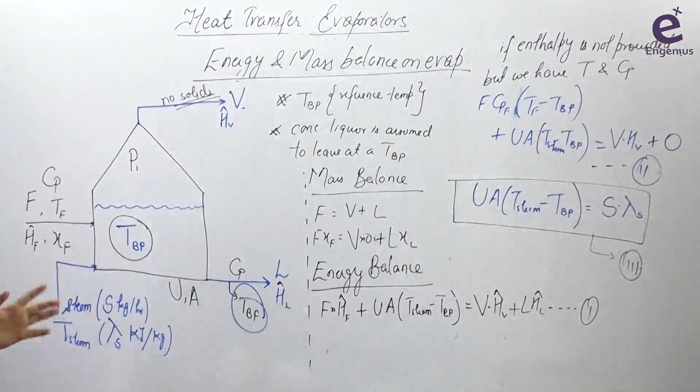You might ask, can I write this instead of that? Yes, you can, depending on the question. Sometimes the question asks for steam consumption - how much steam will be used - so why write the enthalpy equation? Just write S lambda S instead. Sometimes they ask for heat transfer area, then why write that equation? This is a very simple balance, no difficulty in it - just read the question properly. See what is given, and apply the proper energy balance.

This was about the energy balance on the evaporator, and the same energy balance can be applied for multiple effect evaporators also. This much discussion is sufficient for evaporators. After this discussion, in GATE you will hardly find 4-5 numericals in the past few years - even across 30 years of papers, you'll hardly find 5-6 numericals on evaporators. All of them can be solved with whatever information we've provided in this topic. So this was all about evaporators from my side - just go through this, it will take hardly 2 hours of your time, and then the evaporator part is done.